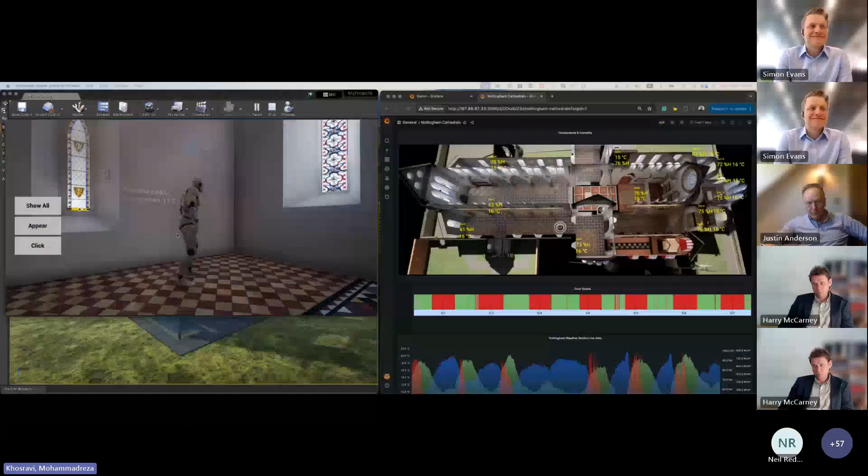I'm interested to share the last two projects that we've done based on IoT, machine learning and digital twin. Can you see my screen right now? Yes, we can see your screen.

In our last project, we did a project with Nottingham Trent University cooperation doing a church project, the Nottingham Cathedral project, where you can see us monitoring this heritage building. We're monitoring temperature, humidity and air quality, and we're using AI to analyze this data.

And we present this data in two forms. You can see this is the data, the history of data. Here we can see every detail of data, history of data, performance.

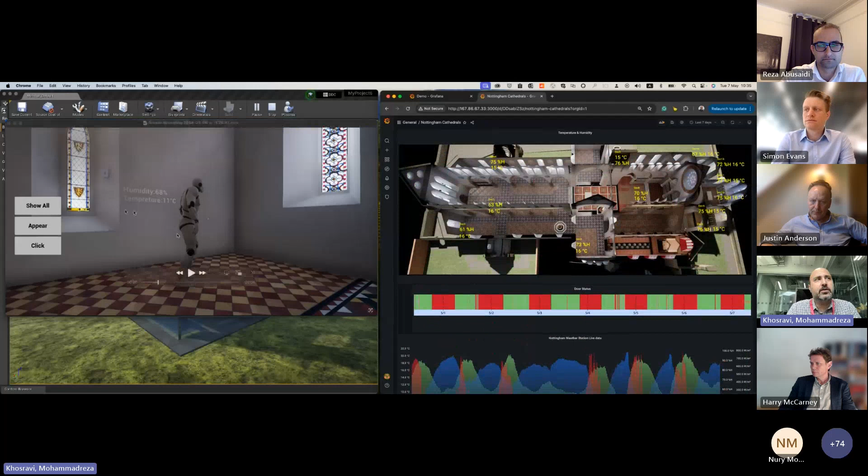And on the other side, we have digital twin 3D models that you can see here, a sample of how we can use a virtual robot to walk through the building to check the sensors, for architects that are interested to see the layout of the buildings.

And this is the model we generated for researchers to find out how they can improve this heritage building, because the challenge we have here is a high humidity level.

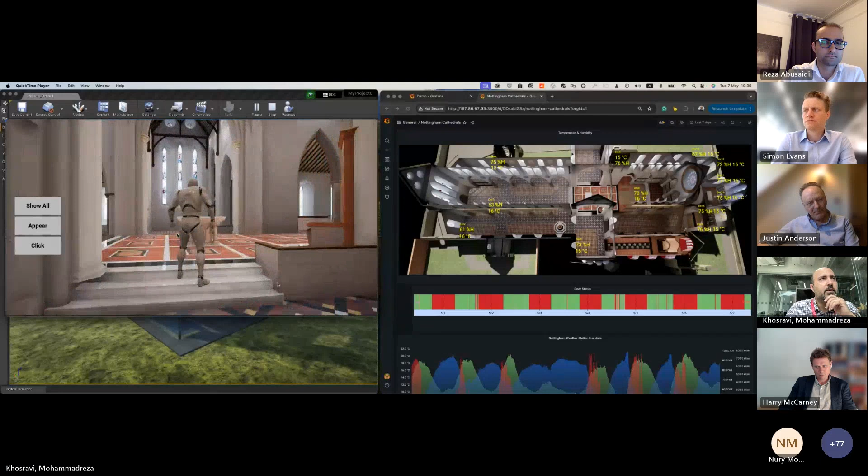The researchers are trying to find out, based on the analysis data and the modelings, everything, how they can improve these buildings. You can see any detail, because this is laser scan, every detail is there. Measuring, simulation, whatever you want.

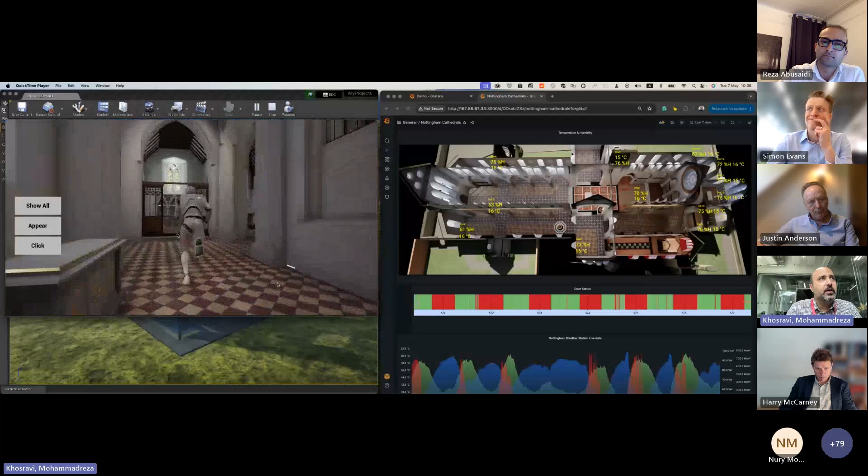You can see all the sensors installed in the church are there. And every corner they want to monitor, an exam they can do, or see. You can use simulation like a dehumidifier, how it can impact the reading of temperature and humidity in this building.

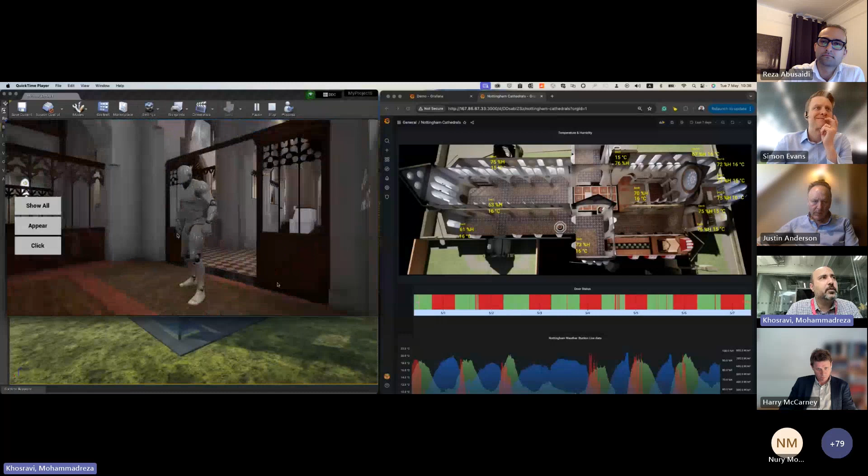This is one project. And the other project I'm interested to share here, let me show you here. Also, we're using digital twin IoT at level 4, digital twin level 4, for energy optimization in the building.

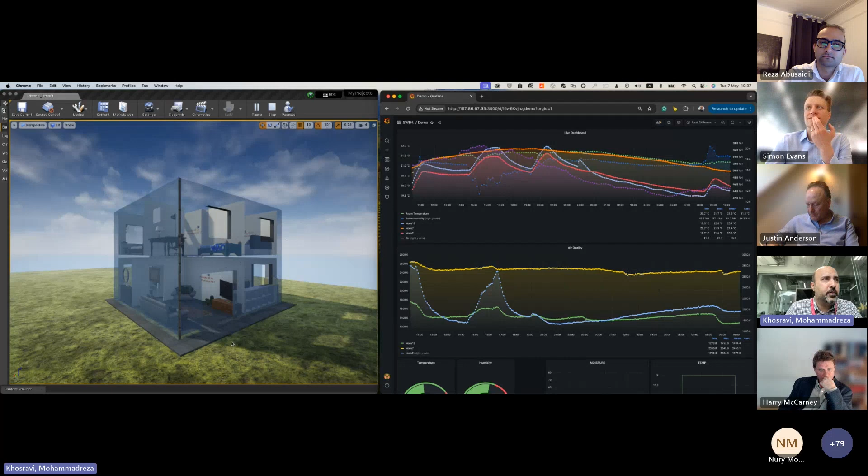You can see this is one project, a 3-bed house that we're monitoring for temperature, humidity and air quality as well. You can see the history of data here.

And also we are able to, like the other one, walk through the building and see exactly what's going on there. We can walk to any corner of the building. We can see the detail of the information.

And this is a good technology for many users based on their requirements. If it's a data analyzer or an architect or whatever, this kind of technology can provide information for them.

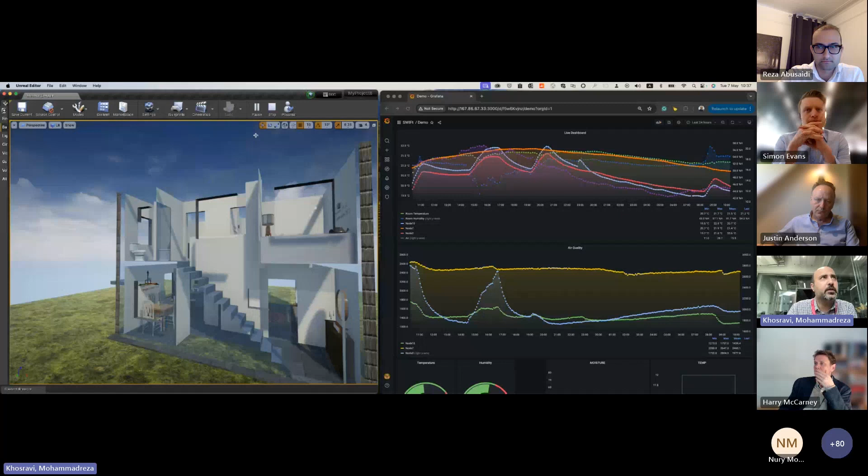Or even we can put it in play mode. Let me show you as a virtual robot walking through the building to investigate the building layout. You can see I can walk anywhere, and it's exactly the same layout as the building we are monitoring.

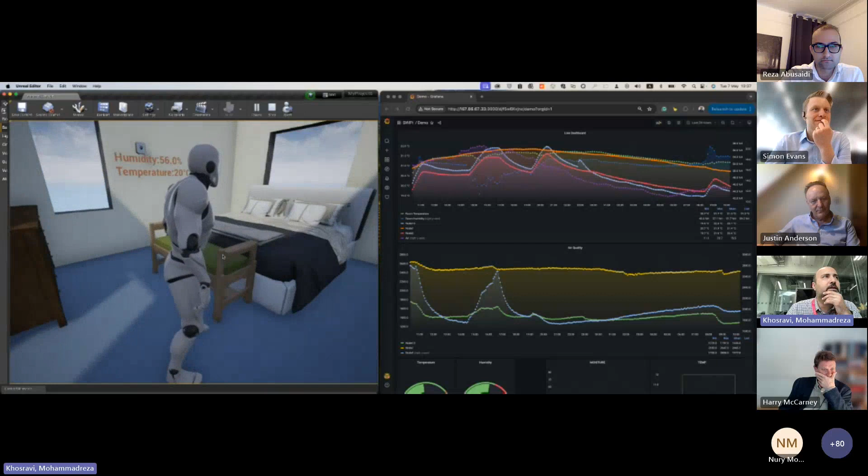And interestingly, this is a fully automated system that uses AI to monitor and control the thermostat. And in the last 3 months, we've managed a 30% saving in this building.

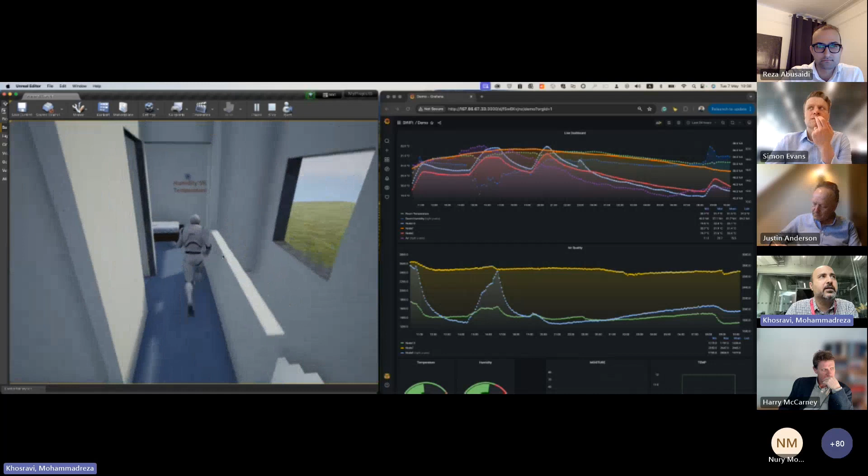Only by monitoring with the advanced sensor and thermostat that can be controlled by an AI agent optimizing temperature in each level and each room, because we have occupancy level, temperature and humidity data.

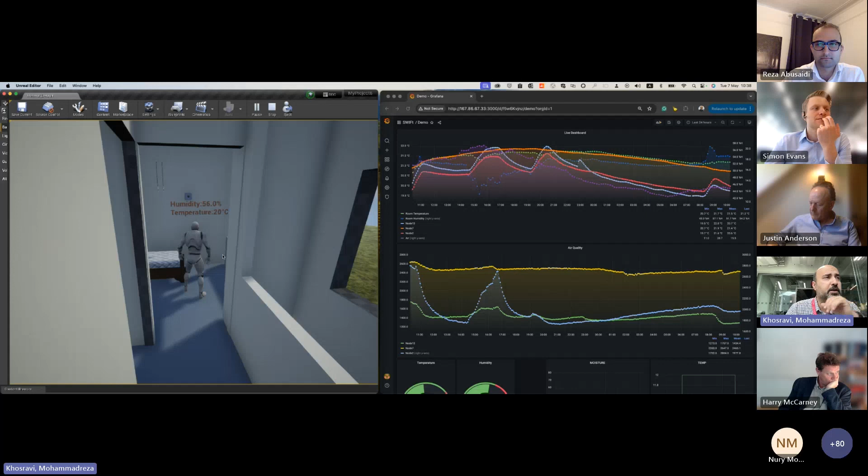Yeah, it was a good achievement. We achieved 30% saving in this building based on the information, without any alteration to the buildings. Yeah, thank you.

Thank you, Mohammadreza. And this was just a simple scenario - if you're into construction, homes, all the way to large infrastructures, it can be deployed onto large environments where real-time optimization can take place. All the way from small use cases like a thermostat to other scenarios where you have to engage pressure gauges or other relevant parameters.